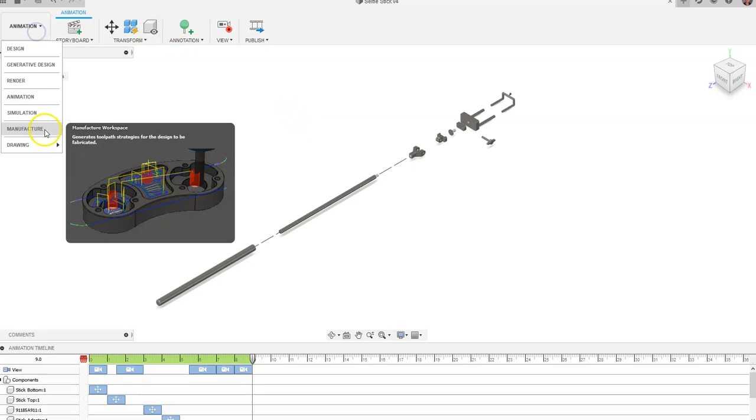So I'm going to go to animation, then drawing, then from animation. When I come over here, there's different methods that I used to try to explode the view, and I went too far on this one, so I created a new storyboard and went through different ways I wanted to create the animation, and I can pick whichever one I want.

Now, if you only did one - obviously I don't want this assembled view. I do like storyboard 4 that I did. I created different types of ways to take the selfie stick apart with different distances and things like that. I'm going to stick with this one.

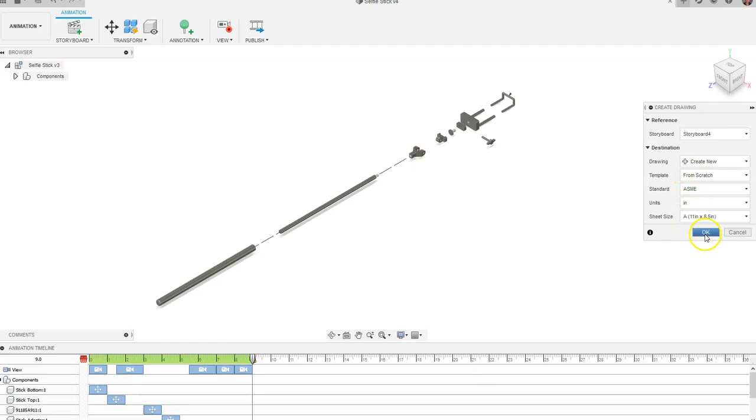We're just going to keep the template from scratch. We could browse for a template, but we're just going to keep it. I'm going to keep it at sheet size A, 11 by 8.5, and say OK. It's going to automatically generate a brand new drawing for me.

Now notice how it says various projects. I just have a folder in Fusion 360 called various projects. This is one of the projects I was working on.

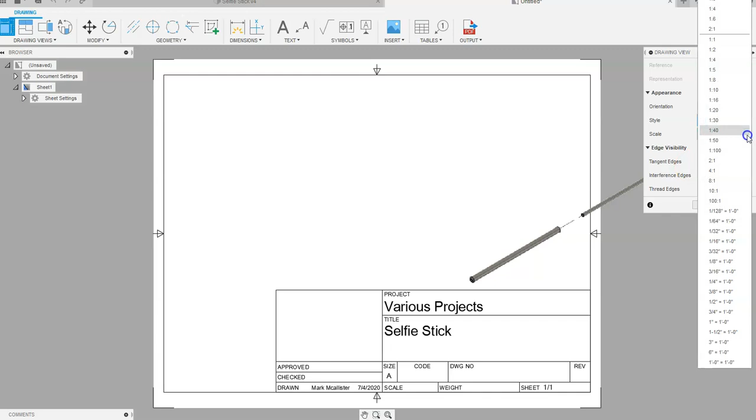So if I go to 1/8 and come up to 1/4, this looks like a fair size. But remember, we're going to be placing a parts list in here, and we have to do balloons. So 1/4 looks too big, and 1/8 looks too small. I'm going to say I want 1/6. You might not see that - that's way too big. I want to go 1:6.

So one thing I might do in here, it says 1.6 in this case, but I want 1:6, a ratio of 1 to 6. I'm going to go ahead and place this, and say OK.

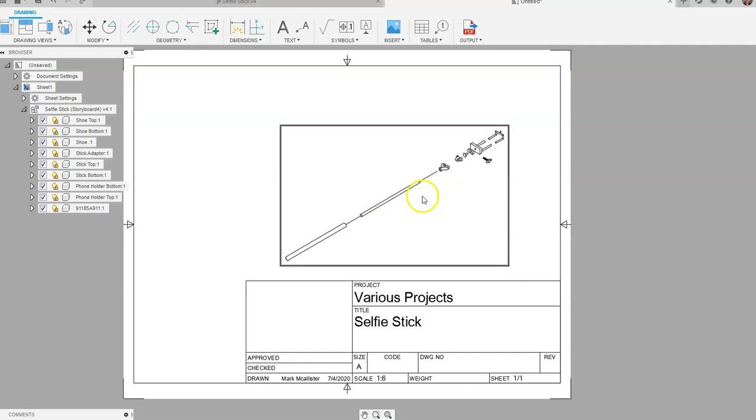And we have for ourselves the lines that showed how we took it apart, the axis lines that exist. We also have this title block down here at the bottom. Now, if I don't really want a title block, I have this title block down.

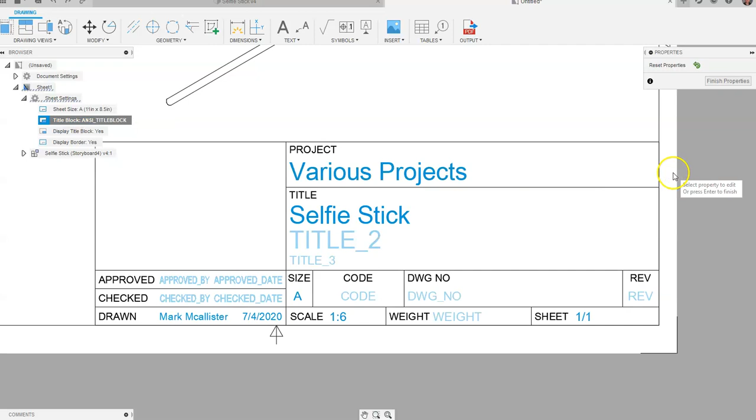I'm going to right click on that, and I might say I want to edit the title block - I want to completely get rid of it. So if I go to change title block up here, I might want to take away some things and go away from that. If I hit undo, I can right click on title block again, and just go to edit properties and say I really don't want to keep this.

I could come in here and change the name of different things. I can go to finish properties. If I go to change title block again, let's just get away from this - let's not even display the title block. Let's get rid of that. So there's different things you can do with a title block.

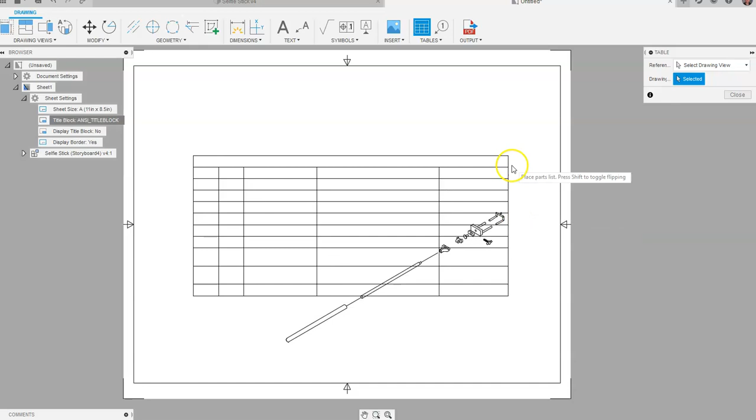I'm just going to drag this down towards the bottom because we are going to be placing a table. So I'm going to come up to table, and it's automatically going to see the selfie stick as the object we're going to be creating a parts list of. I'm going to click to place it, and you're going to see automatically it's going to give me the balloons. Now the balloons are going right into the object.

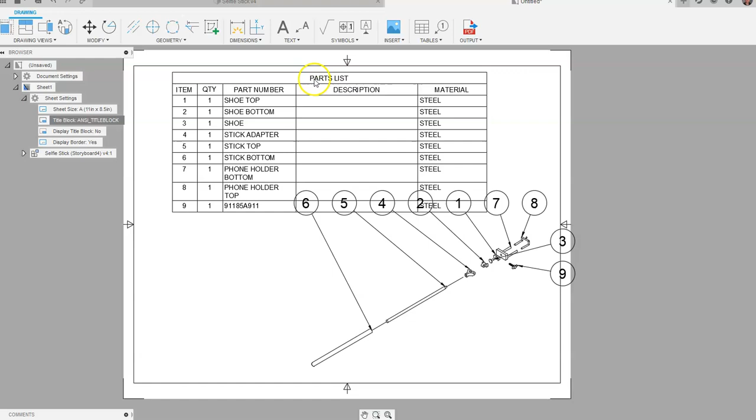I want to drag the view down a little bit, and I'd like to be able to drag the view of the parts list over. So if I hold on to one of the words, click on the parts list itself, I can hopefully just click on one of the words and drag this over here to the side. It should allow me to just drag it over.

Now, you'll notice that I have a lot going on with the parts list, and it's taking up a lot of my page. If I don't want to keep everything that's on the parts list, I can just double click when it highlights. I really don't need a description right now, and for the sake of discussion, I really don't need material. I'm going to say close.

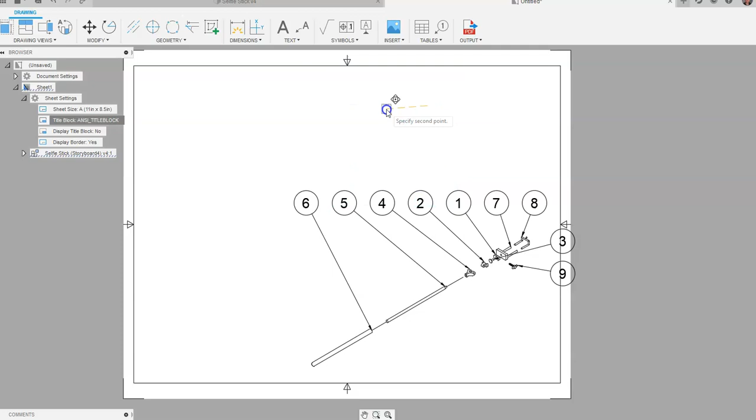And what that's going to allow me to do is drag this over, and it's going to take up a little bit less space and give me some more room to work with. So I'm going to drag this over to here. Now, when we create balloons on a parts list, we don't want it to go through any object. So as I click and hold down on this and try to drag this over, that one's fine.

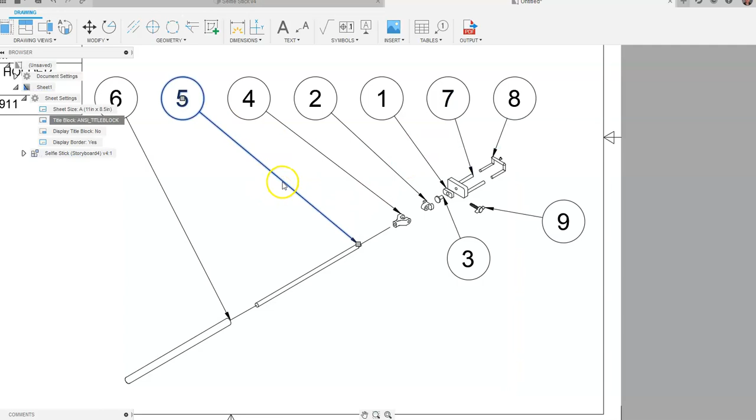A lot of these are fine, but let's just say for the sake of discussion that you don't like one of the balloons. I'm going to click on one of these balloons, right click, and go to delete. Then I'll come back up to balloon at the top, click on one of these objects, and drag out. I'll place this balloon here because I want this pointer to be right here in the middle, and I'll say close.

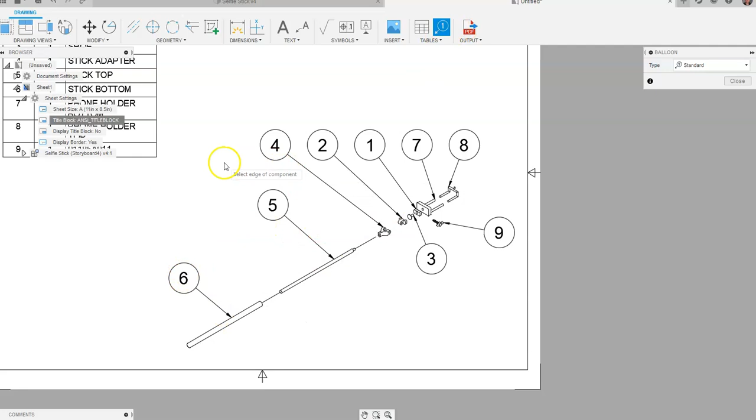You can go in and place balloons as you wish. Now, for some reason it wasn't letting me select right on that, so I'm going to select on the actual object itself. I can hit delete on my keyboard also, which is easier. I'll click on balloon, click on the object, drag out, and place balloons this way. I can also click inside the object and drag them in closer. However I wish to place the balloons is how I can place them. You might want to place them manually yourself, or keep these.

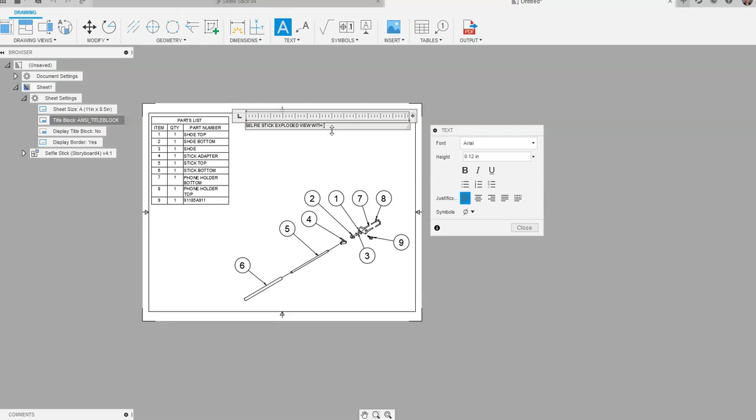Now we're going to go up to text. We can click on text and drag out a window, and we can place whatever text we want right here in this box. We'll get a little dialog box, and you might call this selfie stick exploded view with balloons. I'll keep it in all caps, and say close. That's a way we can go about placing text on the object.

We could actually come into the parts list and add more things, but just for the sake of this view, I really only want to keep what we have.

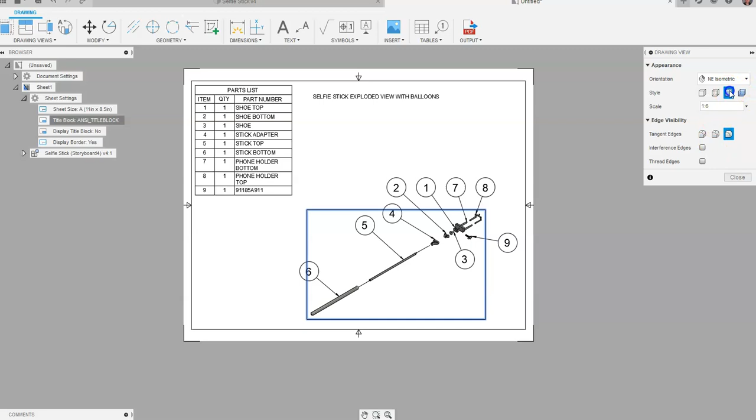Now, if I said I want this to be in color, I can go to Edit View up here at the top, and we might say I want this to be totally filled right here with the actual color of the selfie stick. You can change your isometric view according to the view cube you have, but this is the isometric view that we use to make the animated exploded view.

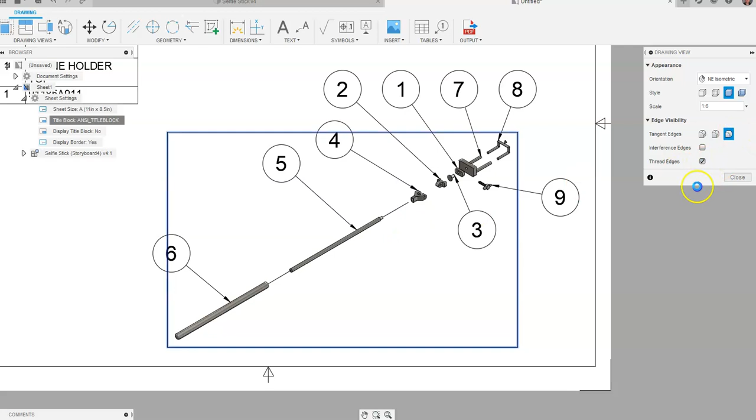We would generally want to keep with that unless you wanted to change it. So when you place the view at the beginning, you can change the appearance, change the scale, and we can change it to where it shows tangent edges. If it had any kind of threads, we might want to show those thread edges. So we do have some threads in here, and we actually see those edges there—they look a little bit blurry. That can take up a little bit of memory when you try to render something.

But to create the exploded view of the selfie stick and show each part and how it relates to the parts list, and also the components you have when you're creating the assembly, we would need to see a drawing like this to find out what everything's named. So number 6 here is the stick bottom, and 5 is the stick top, and we know what everything is made of.

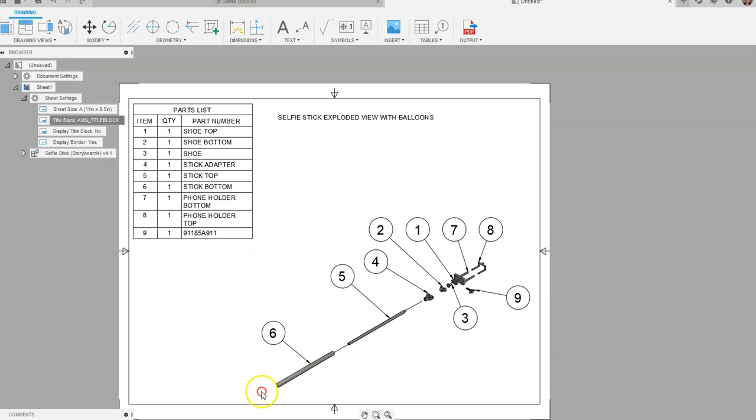If we think that by looking at this we can change the scale a little bit, I'm going to go to Edit View here. We were at 1 to 6. I want to come up here to the top and say—I think we might be able to go back to 1 to 4. Let's see what happens here. Is that too big now?

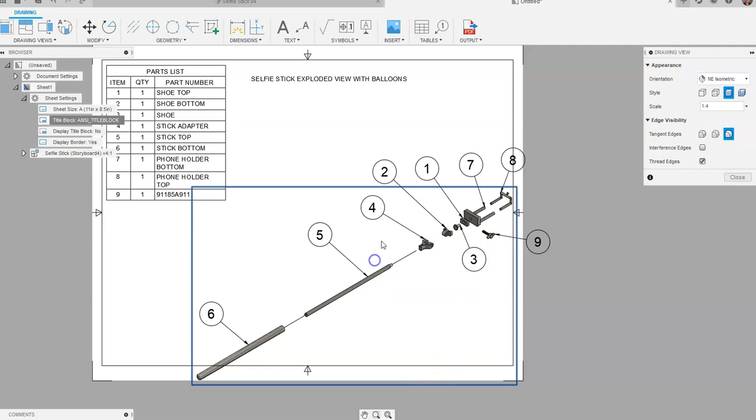Maybe we can come in and actually move this around a little bit. So as we go about creating drawings, we can always decide the scaling and whether or not we think we can move things around. I like this scaling myself. If we click here in the middle, let's see if we can drag this in just a little bit and take up a little bit more of the page. I always say you paid for the whole page, you might as well use all of it. So we can just keep that.

This is a nice, full use of the economy of the sheet of paper. You want to take up the full sheet, not a small area. We got rid of the title block, which can be a necessity—I encourage you to create your own title block. I have another video about how to create a custom title block where it pulls information and puts it down here on the bottom, giving you a lot more room to communicate things about the design, as opposed to just that information that's in the title block.

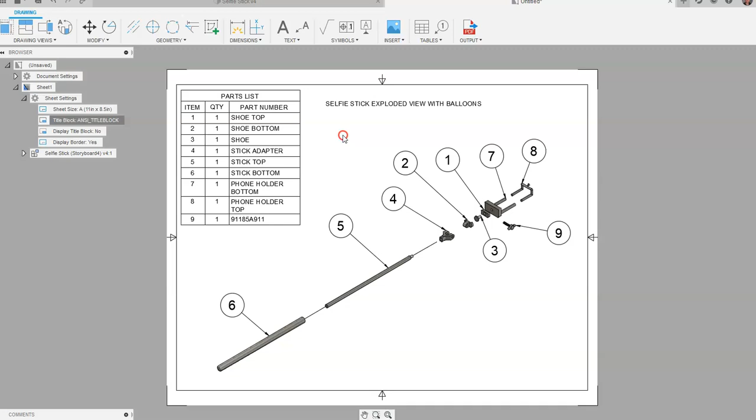So this has been a video on how to go about creating a drawing of your exploded selfie stick view with a parts list and balloons, and how to scale a view.